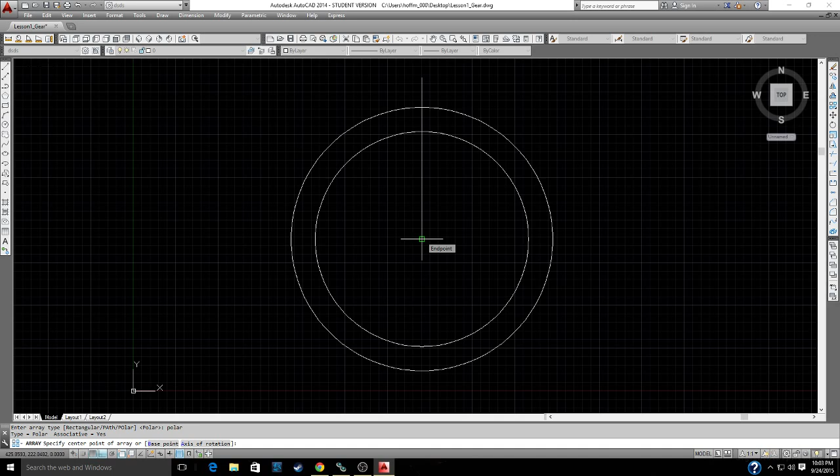We're going to type array, select our line, right click, and it's going to ask you what type of array. We're going to do a polar array. You hit enter. It's going to ask you for the center point of your circle. It's right there. By default, Autocad thinks I want 6 items. If I did that, I'd have really big teeth on my gear. I don't like it. So if I type I, hit enter, it's going to ask me, well, how many items do you want? I think I'm going to go with 15 teeth. No real reason. I just want to see how many it makes.

It's pretty decent. I think 15 might still be a little bit too big, so if I hit I again, enter, it's going to ask me. I'm going to take it to 18 teeth. That looks pretty good to me. I can even make it smaller if I want. I'm going to stick to 18. You want to go ahead and hit escape, clear everything out. There you go. Next thing you want to do is when you go to make your teeth, you want to have the ability to do it.

Right now, CAD still thinks all those lines are part of an array, not letting us edit it. I don't like that. Clear everything out. Type in explode. It's going to ask you to select what you want to explode. I want to select all those lines. Right click. Now it exploded them. If I click on them individually, I can edit each line. Cool. Now we're ready to go. We're going to make some teeth.

We want to trim things up. To do that, type in TR. That stands for trim. We already know all these little spokes on the outside, they're no good. We don't need them. So if you right or left click on the outside of the circle, the very outside circle, you're telling CAD, I want to keep that.

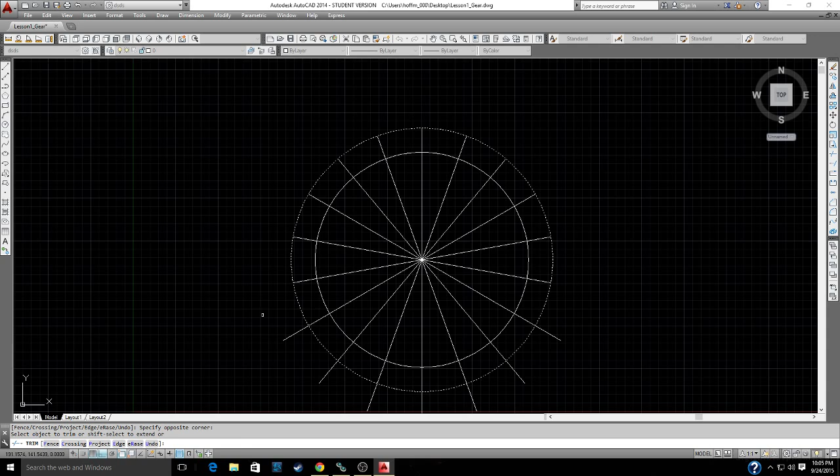Then I'm going to right click. CAD's saying, okay, you want to keep that. Now what do you want to get rid of? I'm going to get rid of that, and that, and that, and that. Go ahead and just go around your circle, get rid of all those spokes, because they're not needed. Not for this gear.

Alright, when that's done, hit escape to clear it out. Now, we're still not done. We're going to go ahead, zoom up, take a look at what we got. A gear is simple. You've got the gear, and then you've got the space. Then you got the gear, teeth, and then the space. We got to make that.

Type in TR again. We know we want to keep this. We don't need this. So to do that, you select this polyline and this polyline. Right click. Get rid of that. We're going to do that the whole way around. So while I do it, you go ahead and do the same thing, and we'll meet back up once it's done.

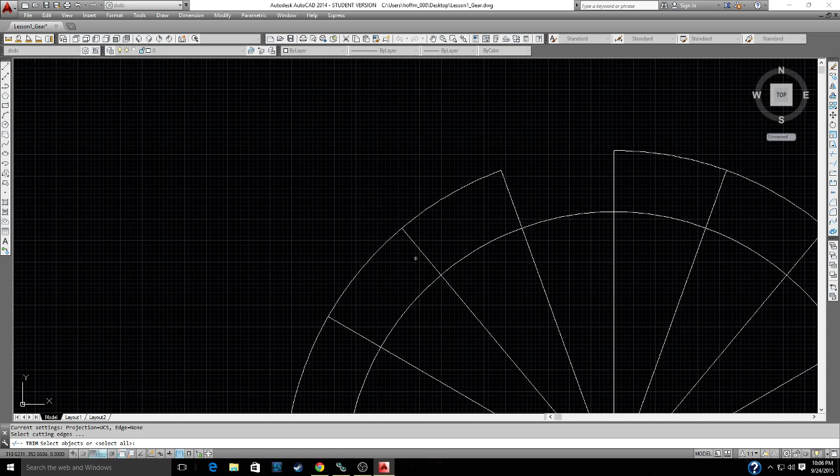As you can see, there's some things within CAD that are repetitious, but what I like about that is, as a beginner, that forces you to learn that command. Like you can see, I made a mistake. If you make a mistake, type U, hit enter. It's the same as undo. It's going to undo the last thing you did and get back to what you were doing. It's that simple.

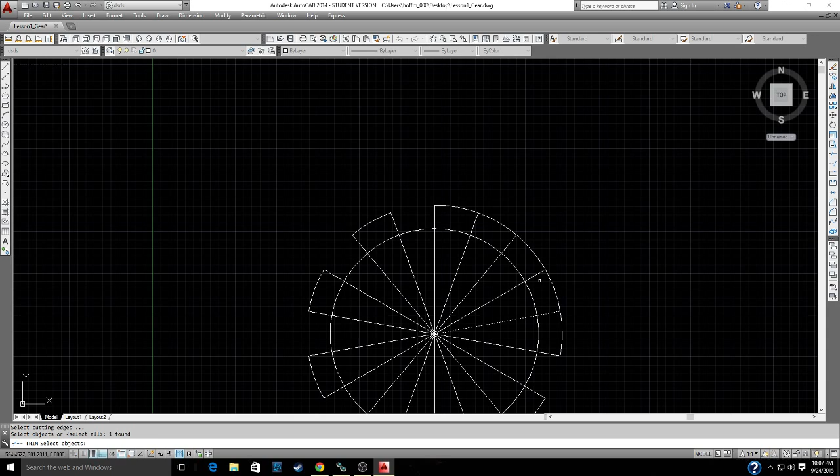Sometimes when you're dealing with a lot of different icons or the same icons, whatever it may be, you tend to make mistakes, get ahead of yourself. No big deal. There's always a feature to correct what you messed up. Just like how I did there. There we go. Now it's back. Very last one. There we go. Now I've got that part of my gear, but it still doesn't look like a gear. It's not supposed to, but it will.

We don't need any of the lines that are going through the tooth part of the gear. So what you want to do is just go ahead and select everything that's inside the circle. And then right click to say, now I want to get rid of stuff. And click on every line on the inside of the tooth. It's not needed. Done.

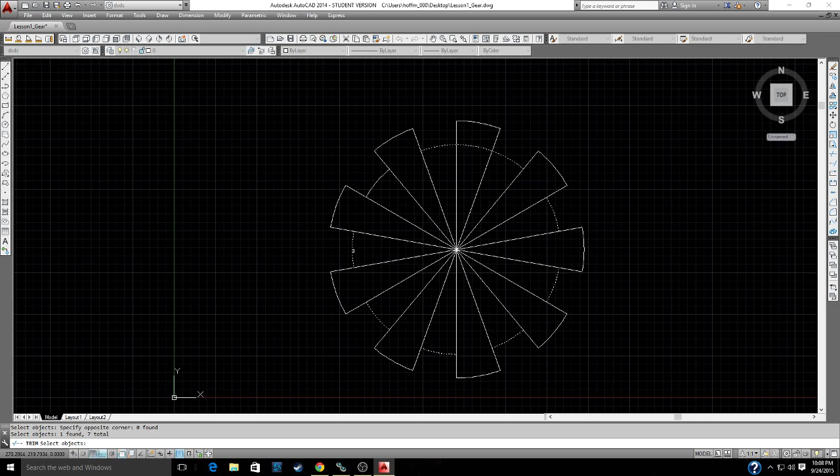Now the last thing, it's like, well, now I got this little starburst looking thing. TR again, and you already know that you don't need anything that's inside of what's left of this circle. So to do so, you just delete this and everything else inside. You'll notice I forgot a space there. It's no big deal. You just go back to what you did before and get rid of it. Cool. Now we got something that looks like a gear. We got to do something with it.

Well, in CAD, we can't do anything with this while there's individual lines. We need to join those together so that they're one. To do so, you type join. The little square comes up, select everything. If you did it right, you'll see down here it says 31 segments. Yours may be more than 31. It depends on how big or small you made your gear.

If I select it now, you'll see it's still only in sections. Now, that's because given what I gave CAD, it couldn't join everything in one shot. Just type in join again. Highlight everything. You'll see 27 more segments were added. I highlight it. Now we're all one. Go ahead, go to File, click Save. Save what you've done.

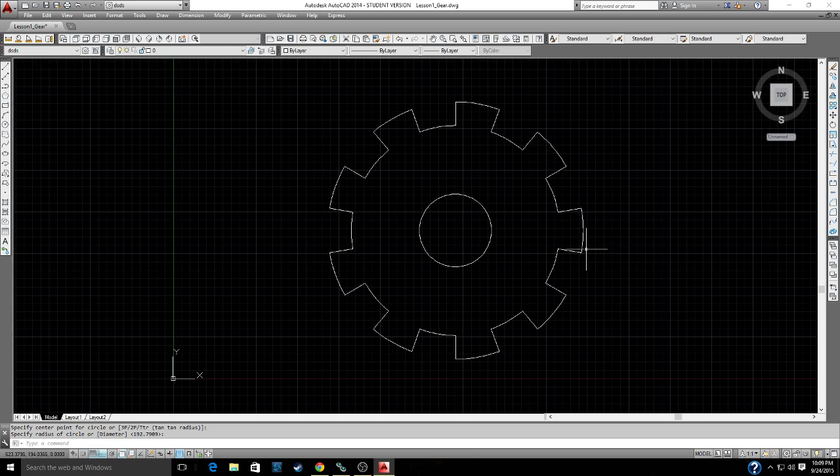Well, let's bring some life to this. We're going to create another circle. So type in circle, go exactly center, and that's going to be the center hole of your gear. Still don't like it. Still seems kind of bland. So what I want to do is I want to create a polyline, put it exactly center, and I think I want it to be about that high. Create another circle by typing in circle. Click on the end of that polyline and make your circle as big as you want. I like that. That looks really good.

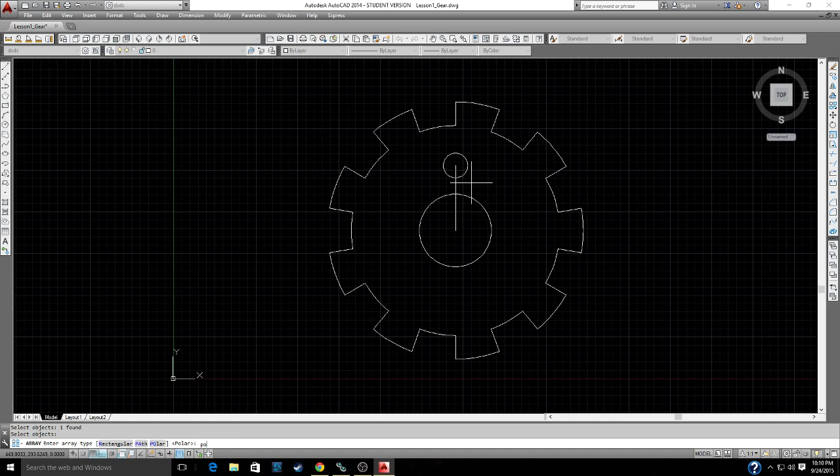Now I want to array that circle. How do I do that? Type in array, click the circle, right click. It's going to ask me how do you want to array it. Polar again, because I'm still going around a circle. Specify center point, which is the exact center of the gear. Now you can see I've got my circles. I'm going to keep them. So what I'm going to do now is hit escape. I'm going to delete that polyline I created.

But we got a problem. My circles are all arrayed. How do I fix that? Well, again, you just click on this one circle. It selects them all. With it selected, type in explode. When you do that, it's going to explode them.

Now I got individual circles. At this point, we've got a gear for all intents and purposes. So we're going to go ahead and make this gear a 3D gear. To do that, we want to change our view. If you don't have this, just right click anywhere where your toolbar panel is, and select View, and it will pop up.

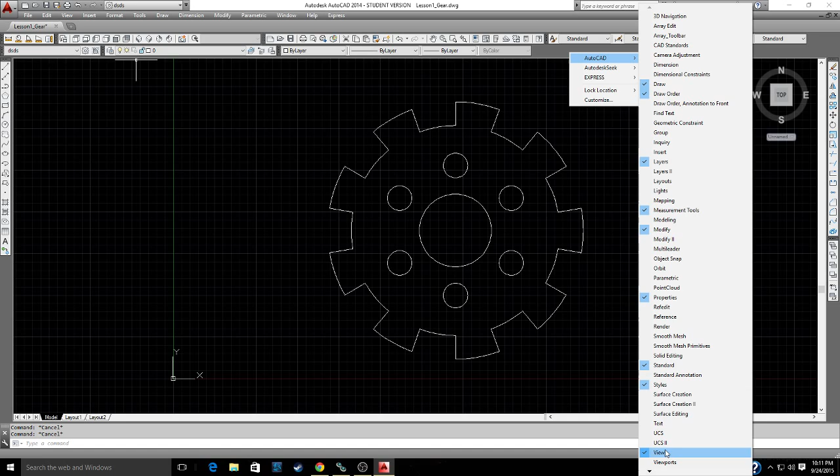Once you have this toolbar up, you want to click any one. I'm going to click Southwest. If I click on Southwest, now it's going to show me what my gear looks like if I'm on the top looking at it from an angle. I want to go ahead and make the body and teeth of my gear look 3D. To do that, I'm going to type Extrude. That is the main command for turning the two-dimensional object into a three-dimensional object.

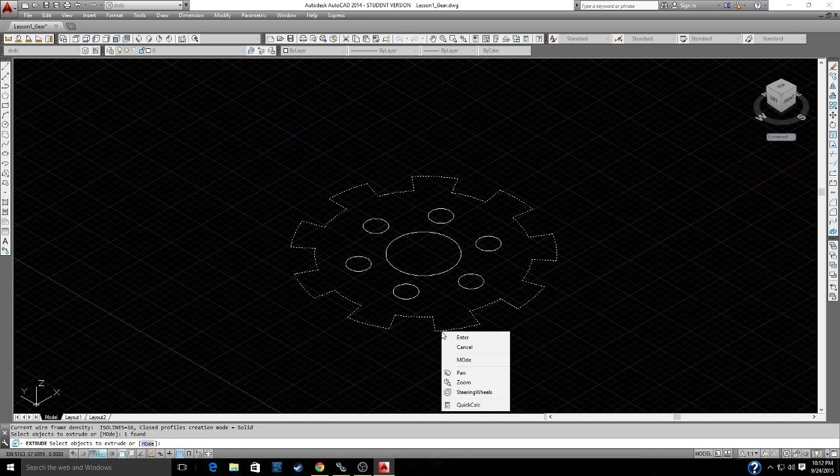So with Extrude activated, click on the body, right click, hit enter. Now you want to specify your height. I'm just going to eyeball it for the sake of this lesson. I like that. Click, there you go. If I type in HI, which means hide, it's going to take away all that see-through stuff, and this is what my gear looks like in a drafting view so far. Cool.

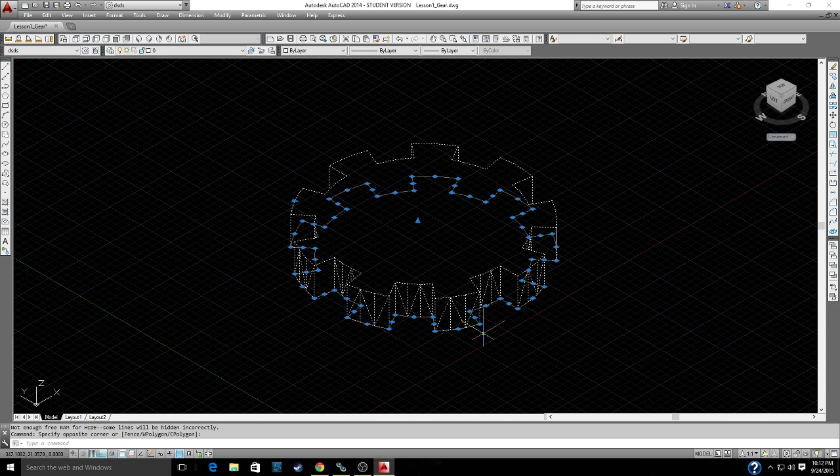Now you're going to notice you can't do anything once you do that. You can't pan anymore, you can't zoom in or out. You can select certain parts of it, but you can't do anything. To change that, just clear everything out, type in RE for regenerate, hit enter, you're good to go.

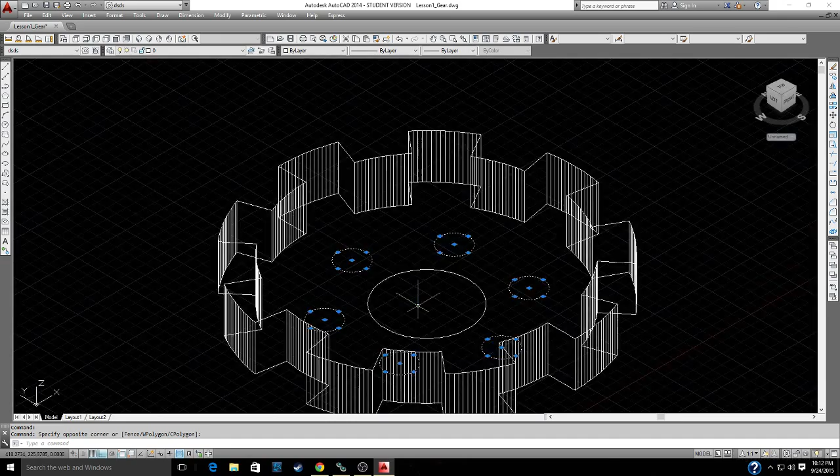Next thing we want to do is these, we know, are going to run straight through our gear. They're straight through holes. So I want to select them all, making sure you're not selecting any other part of the gear. And I'm going to extrude them by typing extrude and bring them up a lot higher than the gear. The reason for that is if I hit HI, now you can see that a portion of those holes are going through the gear.

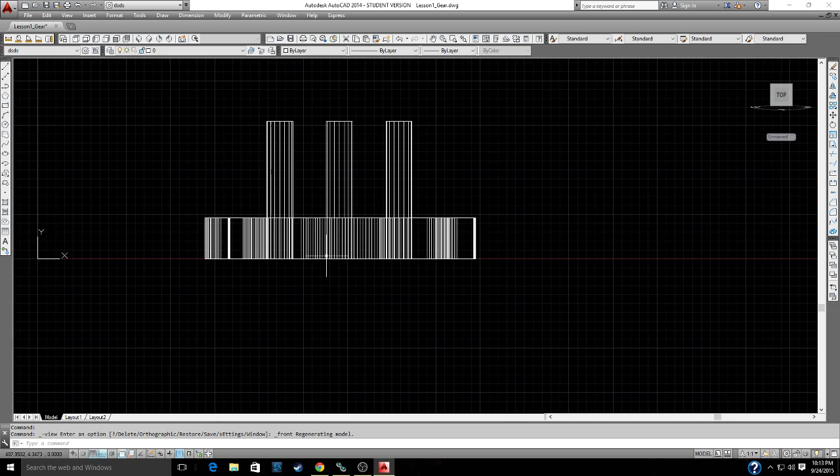The reason for that is because when we take these away, anything not going completely through the gear will remain in the gear, so it won't look right. If you ever need to verify, you can just change your view, let's say a front view. Now you're looking at the gear from the front. You can see they're going all the way down here flush with the bottom of the gear, which for AutoCAD is completely fine. That's considered going through.

But if you're worried about it, just select all those holes that you just extruded, hit M for move, click on any of them, and with F8 on, you can move them down, and now they're going completely through. Be sure to keep F8 on, because the moment you turn F8 off, it's moving it between all views, and your holes could be way off the image. Keep F8 on, which is your orthogonal, you're good to go.

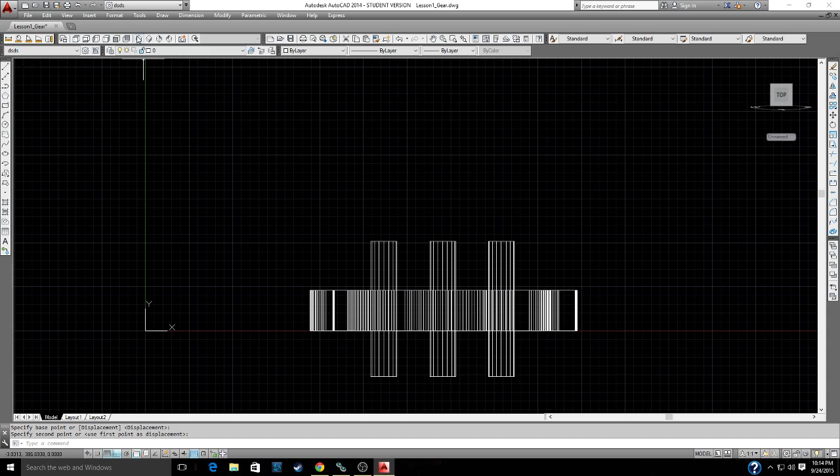If I go back to my Southwest view and type in HI, you'll see I'm going straight through. RE to regenerate. I want to subtract them from that. The word for AutoCAD is subtract. So I type subtract, hit enter, and it's going to say, what do you want to subtract? Well, I want to subtract these from this, but in CAD it's backwards.

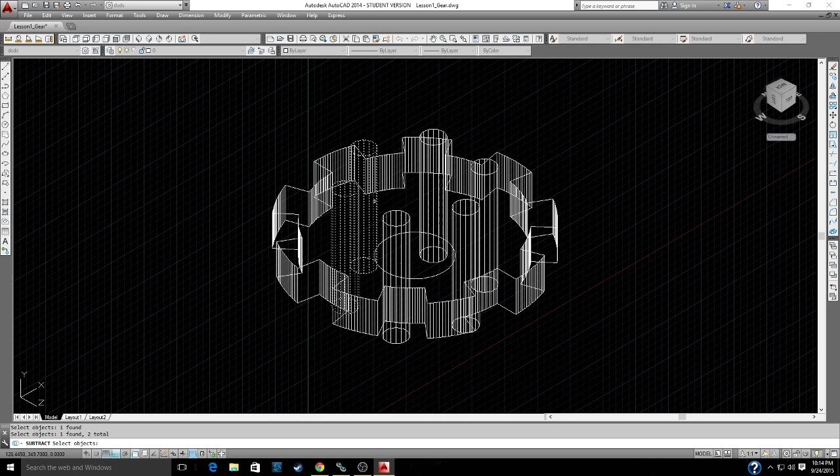You say I want to keep this and subtract these. So you select your holes you just made. Once they're selected, right click, now they're gone. If I hit HI to hide it, you can see it goes straight through. That's pretty cool. It's still not a gear if you ask me.

So now I'm going to go back to my top view. I want to create another circle. I want to click exactly center of my gear, and I'm going to bring it out. If it starts jumping around like that, that's just because object snap is on. Hit F3, it turns it off. I want to bring it out to about there. There's a reason for that, and we'll get to that shortly.

Go back to your Southwest view, and you want to extrude that very first circle that you made, which is the inner circle. Left click, then right click, and hit enter. Lift it up as high as you want. Subtract.

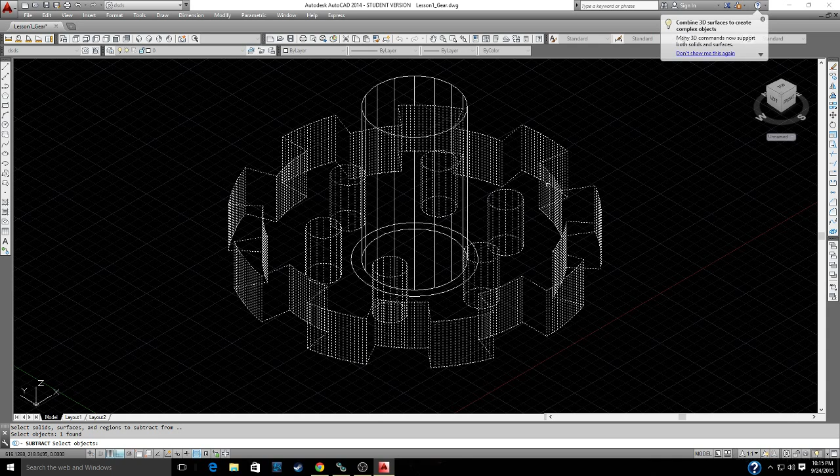I want to keep my gear, but get rid of this center point. There we go. If I hit HI, now it looks like a gear. Well, I don't really like that so much. It still looks bland. So all I want to do is RE to regenerate, go back into my top view.

We're going to go ahead and type in copy, and we want to make a copy of this circle that we just made a minute ago. Alright, so you can copy it and just click it. Type in M to move, or type move, and just move another copy off to the side. If you're worried about it, you can make a second copy. It doesn't really matter. Alright, what we want to do now is we want to go back to our southwest view, kind of zoom in down here.

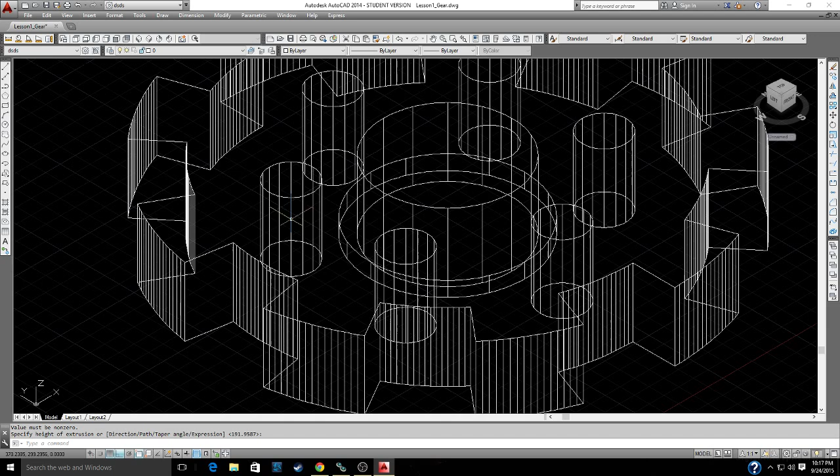Right now, the circle is two-dimensional, but it's sitting at the bottom of the gear because when we extruded, we lifted everything up. We want to go ahead and extrude that circle, but this time we're not going to go the whole way through. This time we want to just go up a little bit, give it a little bit of an indentation. So to do that, click anywhere. There we go. But I'm still not too happy with it because I got to do something with it. So go back to your front view. And you can see it right there.

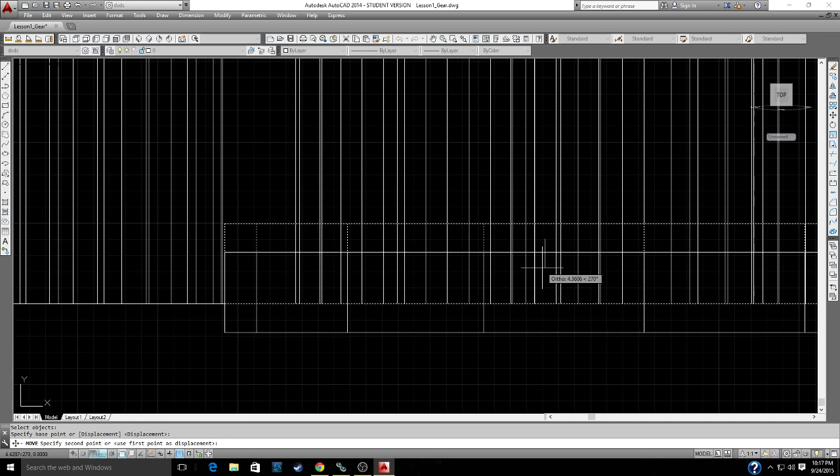If it's a hole that you made in it, you're not going to see your horizontal line. So seeing your horizontal line tells you I got a solid object floating around inside that gear. I want to click M to move. Click on that center, the hole you just extruded, and just move it down a little bit. I'm going to say about halfway. You can eyeball it, it doesn't really matter.

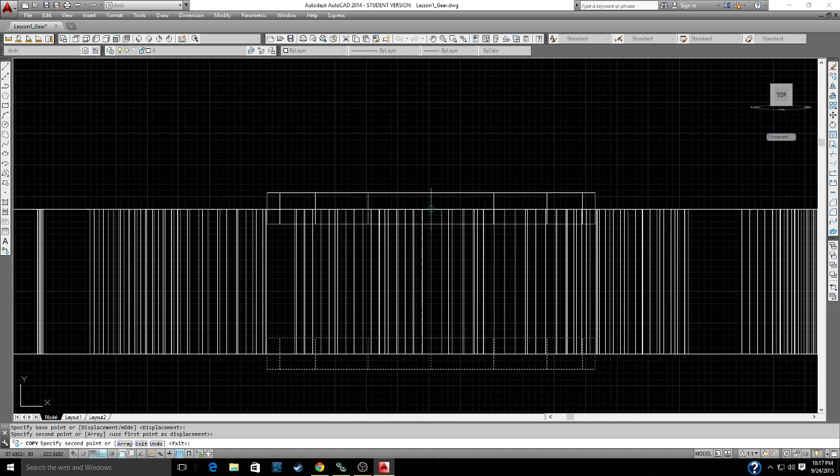Now you want to go ahead and copy that. You can click on it, left click, right click, now select anywhere on the object, and we're going to move it up and click. If I hit escape to clear everything out and I go back to my southwest view, I can hide it by hitting HI, and you can see now it's kind of sticking out on it. If I was looking on the underside of it, you'd be able to tell the same thing.

So I'm going to regenerate by typing RE, and now I want to type subtract. By typing subtract, I can click on this outside gear saying I still want to keep that gear. Right click, but I want to get rid of these things I just made. Right click again, you see it did something, but what did it do? Well, that's what it did. Give you a little indentation, something for a bushing or a bearing, anything. Well, that's cool, but it still looks kind of plain.

So what we're going to do is we're going to go ahead, delete these. We didn't end up needing them. It's always good to have extras. You don't always need them in CAD. We're going to go back to looking at our gear from the top view again. Top view. We're going to type in circle, click in the center, and this time we want to bring this circle out to about here. Oh, auto snap was on and moved it out. I don't like that. Hit U, enter, it's gone.

Type in circle, click in the center, hit F3 if yours did the same thing, turn the snaps off. I want to move it to about here. That looks good. But what am I going to do with that? Well, it's simple. Basically I'm going to take this circle and we're going to extrude the circle. But we're not going to extrude all the way through, because the moment you extrude all the way through, you're going to get rid of everything in here.

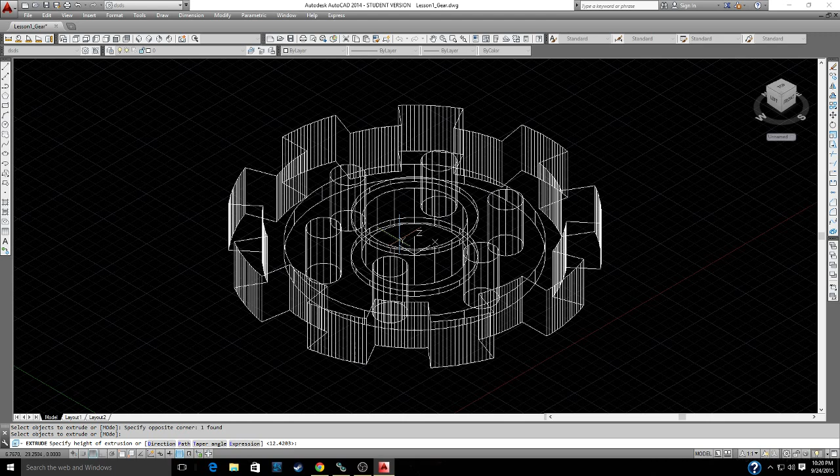So again, what we want to do is we want to go back to our southwest view, do just like we did a minute ago. Type in extrude, click on this bottom circle right here, hit enter, extrude it however deep you want it to go. I like that. Now I'm going to go back to my front view. Alright, I'm going to move this circle, and I'm going to basically make it to where it's flush, as flush with the bottom as I can get it.

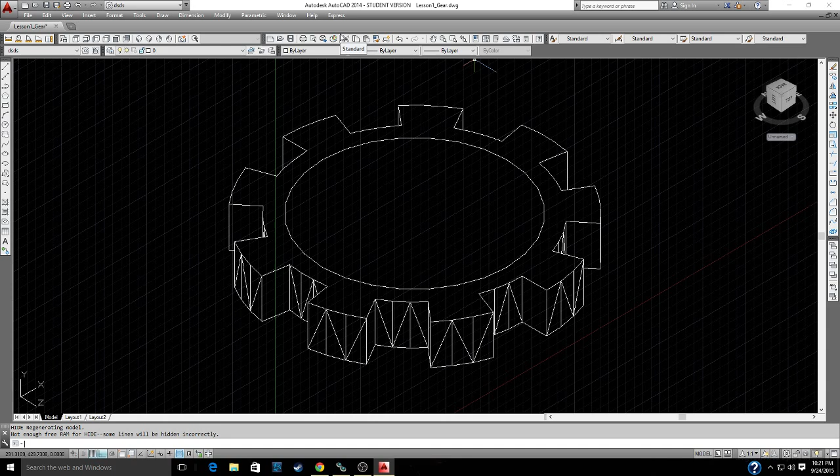Now I want to type in copy, select the circle that we just moved, and I want to click on its plane and basically move it till it's flush. Cool. Now I go back to my southwest view, I hit HI, you see, oh, now everything's gone. Why? Because a solid circle is covering it up. But not for long. And the way to fix that is hit RE, which is real simple, and well, first be safe because we don't want to mess our entire drawing up.

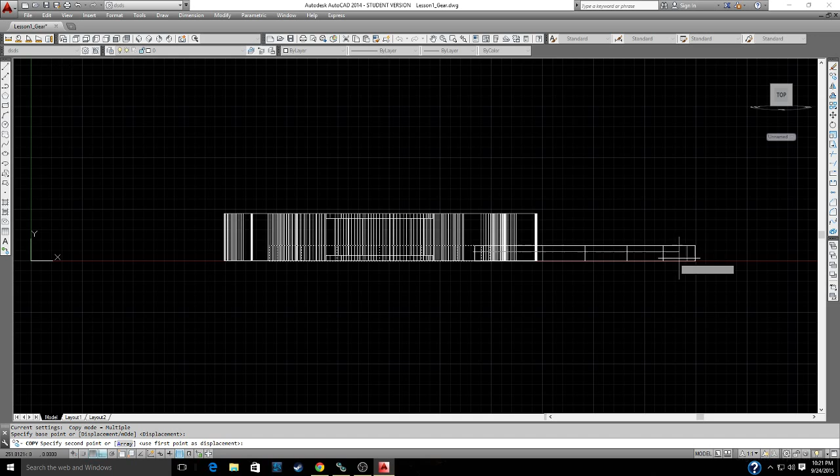Let's go back to our front view and delete the one we just made. We don't need it. We're going to zoom out and we're going to make a copy. I think this is going to make it look better for us. Click on that circle that you made and extruded and just move it out here to the side somewhere.

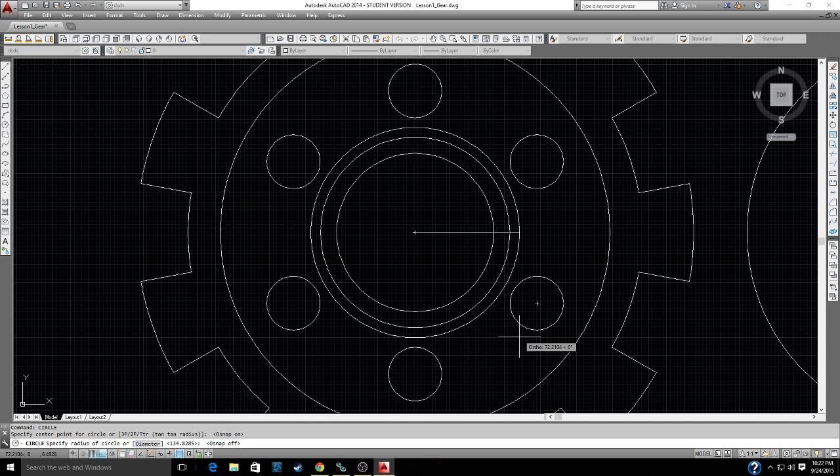Go back to your top view and you're going to say to yourself, well, I want to keep this and I also want to keep this. So how do I do that? Well, what you want to do is create a circle, put it at the center of the gear, and make it about as big as what you want to keep. So whatever you want to keep needs to be on the inside of that circle. So we're going to make it about that big.

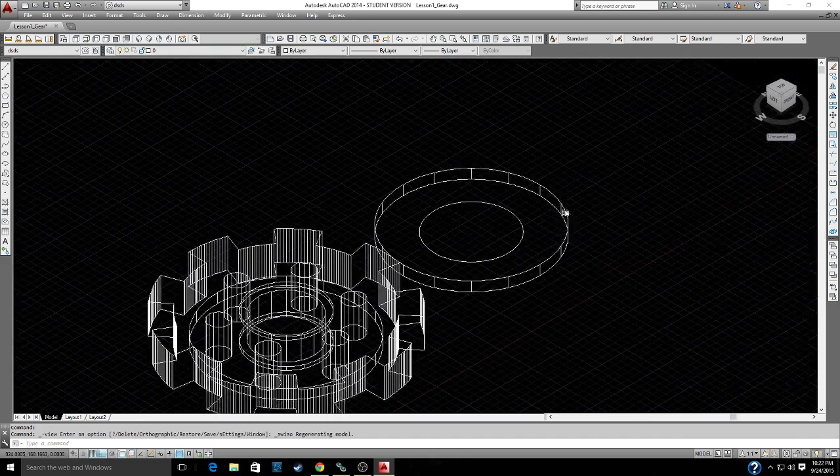We're going to move this by hitting move or typing move. Click on that circle, right click, select the center of it, and move it to the center of the circle you just made. We're going to go back to our southwest view. We're going to extrude the circle we just moved, right click, enter, and make it as big as you want.

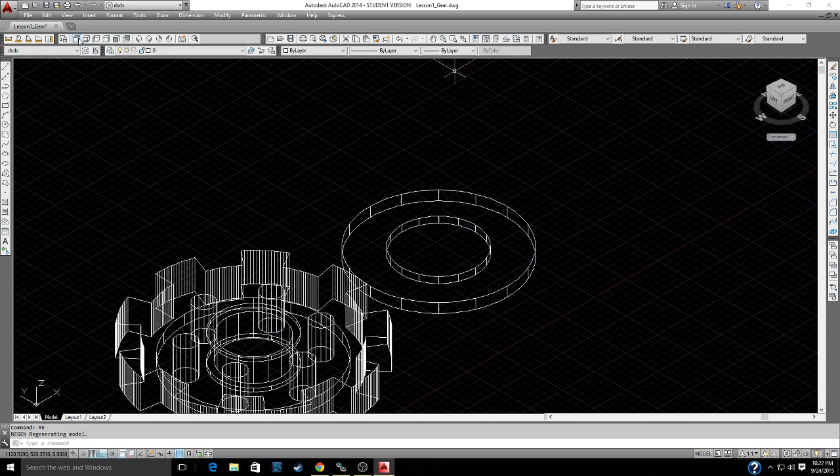Now type in subtract, keep the big circle, get rid of the little circle. Now it's gone. If I hit HI, you can see it's gone. I'm going to regenerate it. I'm going to go back to my top view now. I'm going to go M to move, highlight everything, and the center point of what you just made will be equal to the center point of what you already have. Go back to your southwest view, hit HI.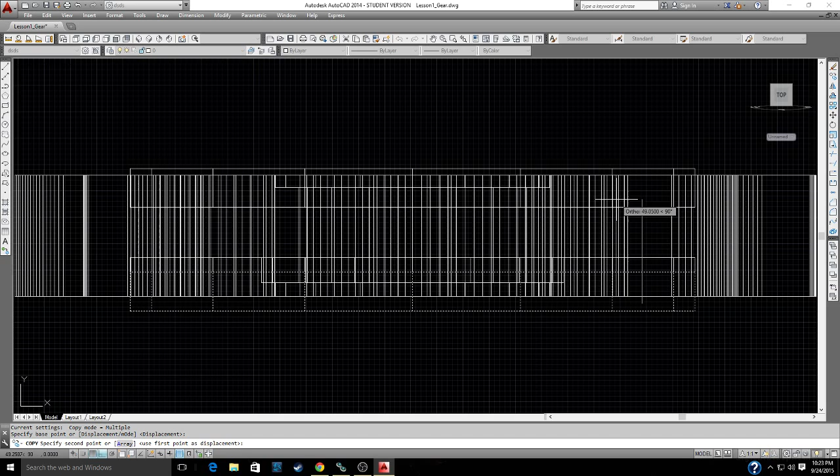I can't see anything. Well, that's because we have to go in our front view and now move everything the way we just did it. So move this down some, you turn your snaps off. Move it down to about there. Copy. And move it. Well, yeah, copy. Make sure you're selecting the right circle since we have a lot going on in here now. Move that. Go back to your view, hit HI.

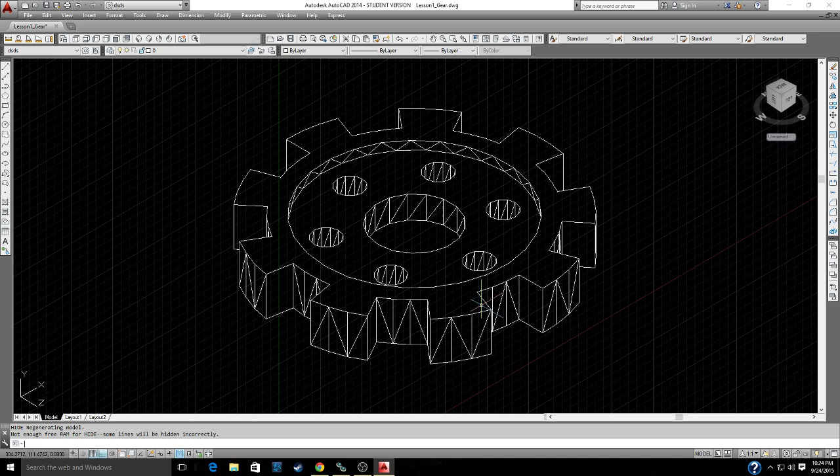Now you'll see it's covered up. We're going to hit RE to regenerate. Now, we got a lot going on, so be careful what you click on. We want to keep our big gear. Well, we want to go ahead and get rid of this and this. Right click. Now if I hit HI to hide everything, there's my gear. Perfect.

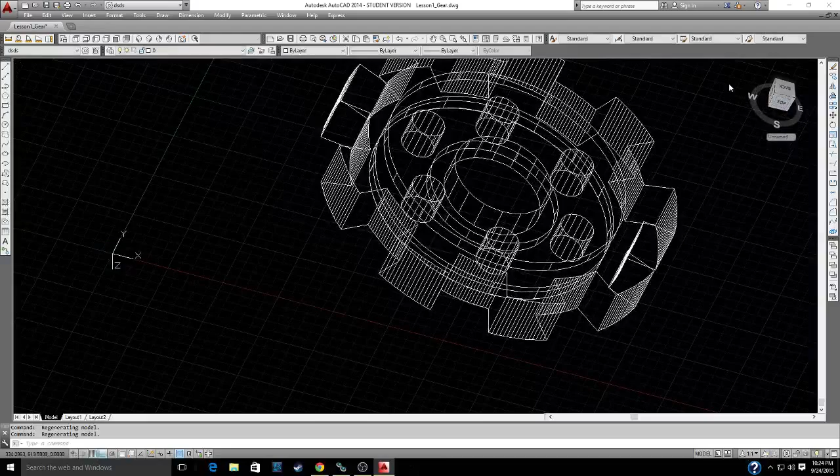If you want to take a look at it, you can just click up here on your little view cube and it'll allow you to rotate it around. Depending on the speed of your computer, it could take some time. For the most part, mine handles it very well, but I'm just not very good at moving around. Alright, so hit HI again. There's your gear laying down at an angle. If you don't like it, you can always default back to your southwest view. Hit HI, there you go. Alright, so we have a gear. One last thing before we finish up.

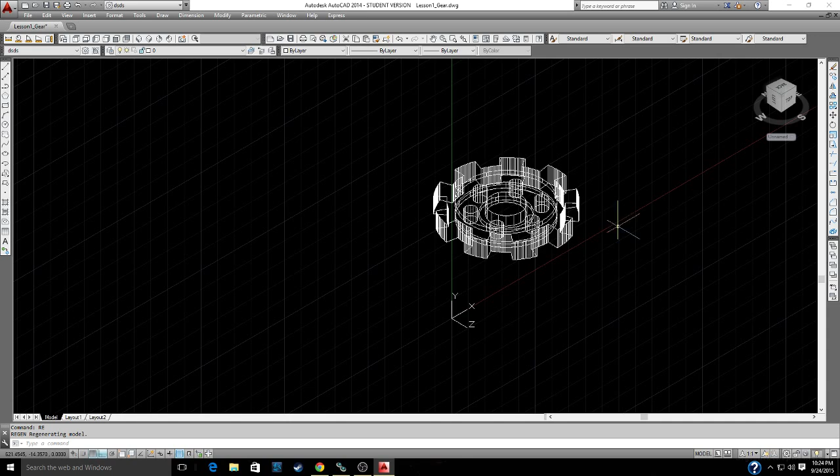Your gear is basically laying down, but let's just say you needed to move it so that you could put it into a machine that you had already built. In order to do this, you're going to come up here to modify, and there's a command under 3D operations called 3D rotate. When you do that, you're going to select the entire object by left clicking, then right click, and you're going to see this little weird sphere looking thing come up. Each color indicates an axis. You've got your X axis, your Z, and your Y.

You need to figure out what you want to rotate it on. And the way I look at it is take your object the way it's sitting and imagine it's sitting on this axis. Now, if I'm moving on that, how's it going to turn? So if I was sitting on the Y, it's just going to spin in a circle. If I'm sitting on the Z, it's going to kind of flip-flop. But if I'm sitting on the X, it's going to move it basically in a rotating fashion.

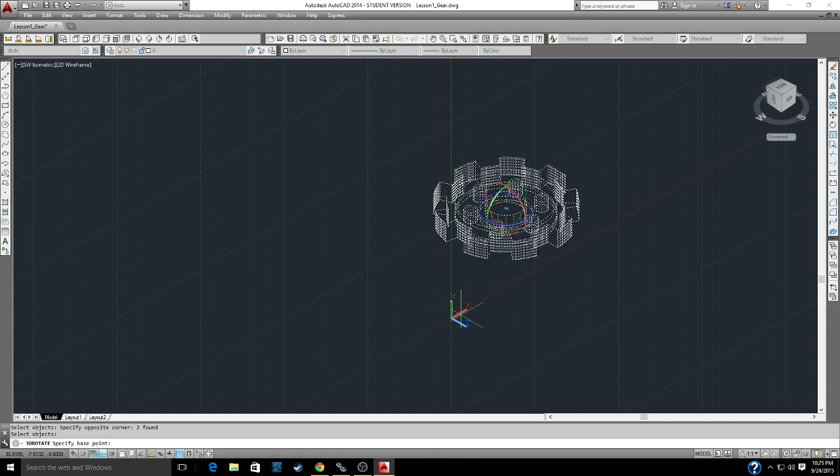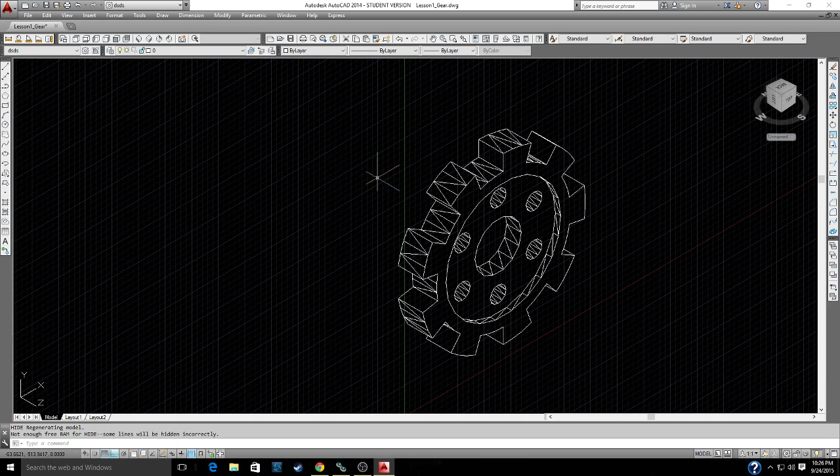So to do that, you highlight over the red, click it, drag it till you get the angle you want, click again, now you're done. If I hit HI, there I am, and I have a gear. Hide it again, there's my gear. Alright, regenerate, go to File, save your work. And that's where we are.

In the next video, we'll go over some options for making this gear look more realistic by adding some textures to it and then adding some lighting. And we'll wrap things up by just discussing some of the other options you might have with it as far as animating.